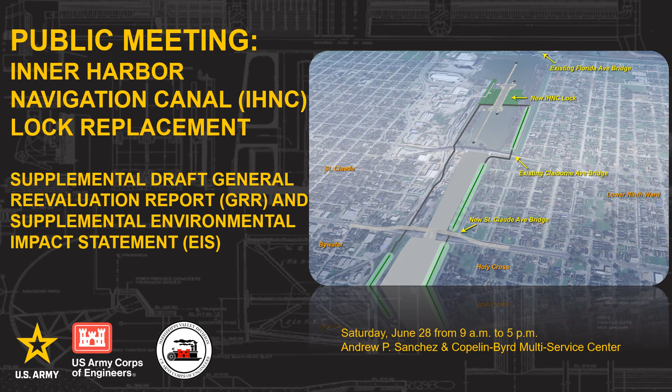The Inner Harbor Navigation Canal connects the Mississippi River to the Gulf Intracoastal Waterway, forming a key junction in the National Inland Navigation System. Just as critical is what surrounds the lock: the neighborhoods of Holy Cross, the Lower Ninth Ward, St. Claude, and Bywater. These are residential, historic, and culturally significant communities, and they're still grappling with the legacy of disinvestment and the lasting impacts of Hurricane Katrina.

The project also plays a regional role. St. Bernard Parish relies heavily on the St. Claude and Claiborne Avenue bridges to reach the rest of New Orleans. Of the four roads out of the parish, two cross this canal, making this corridor a daily means of commuting, emergency access, and economic connection. That's why this project is about more than replacing old infrastructure. It's about making sure the neighborhoods and communities affected, both directly and indirectly, are part of the planning process.

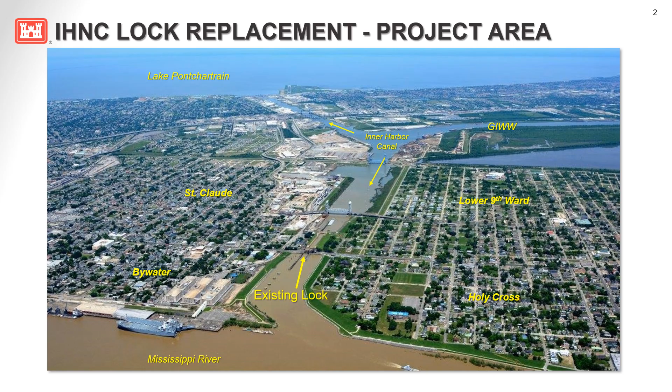Before we dive into today's agenda, let's take a moment to talk about why this lock matters on a national scale. The Gulf Intracoastal Waterway, or GIWW, stretches more than 1,100 miles from Texas to Florida. It allows barges and other commercial vessels to move cargo efficiently and safely without entering open Gulf waters. The IHNC lock is the only connection point between the Mississippi River and the GIWW on the East Bank, and it's a critical link in the inland waterway network.

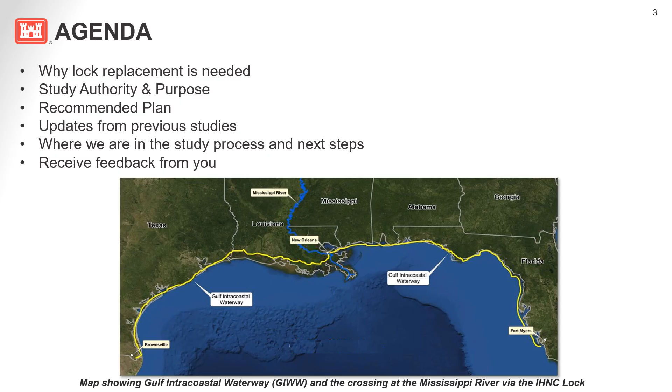It is also a bottleneck that has ripple effects across the entire U.S. supply chain. That's why this project is about more than just concrete and gates. It's about improving efficiency, resilience, and, due to the Community Impact Mitigation Plan and Transportation Mitigation Program, community outcomes. Today, we'll walk through why the lock needs to be replaced, what the recommended plan includes, and how your feedback continues to shape this effort.

The IHNC lock is 102 years old and was built for a very different era of navigation. Today, it's simply too small to accommodate most modern barge configurations. Because of that, the lock now ranks first in average transit time and second in average delay time of any lock in the nation. It's also increasingly unreliable, with more frequent unplanned outages and a growing backlog of maintenance needs.

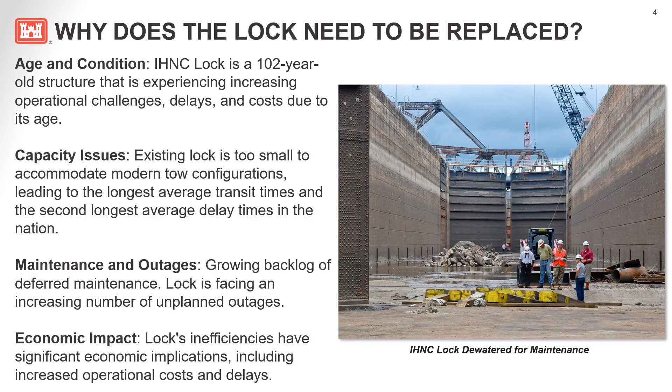These delays increase shipping costs, which ultimately affect businesses, consumers, and the overall economy. These inefficiencies have a national economic impact. Every delay raises costs for shippers, and those costs are ultimately passed down to the consumers. Replacing the lock is essential to ensuring this key national corridor continues to serve the country effectively.

While the lock itself is a major constraint, there are broader infrastructure challenges that factor into this project. The St. Claude Bridge, which is part of the current lock structure, is also over a century old and nearing the end of its useful life. And when the lock is shut down, whether for maintenance or due to mechanical failure, there are no viable alternatives.

The Tennessee-Tombigbee detour adds 17 days to a trip, and the open Gulf route is unsafe for most inland marine traffic. Replacing this lock is about more than navigation. It's about improving reliability and protecting national economic flows while making improvements to related local infrastructure.

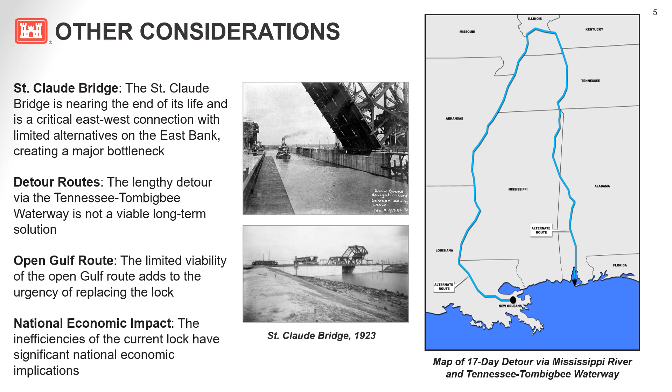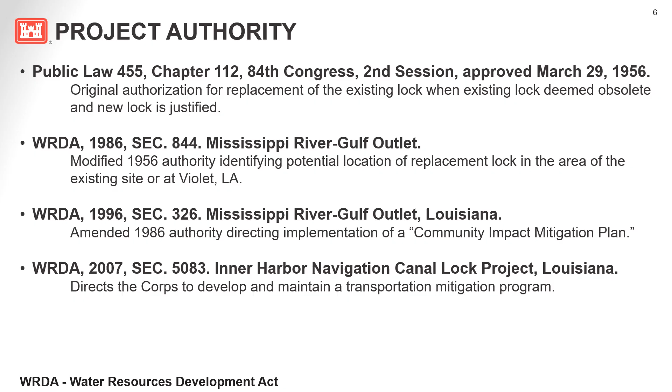The goal of this project is to improve how vessels move through the region in a way that's economically justified and environmentally responsible. At the same time, this project cannot reduce the levels of flood or storm risk reduction currently in place. That standard is non-negotiable and a central part of how the plan is evaluated.

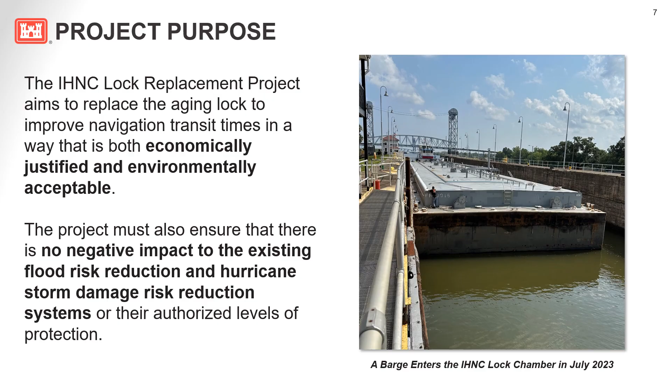On May 30th, 2025, the Corps released the Supplemental Draft General Reevaluation Report and Supplemental Environmental Impact Statement, or GRR and SEIS. This document evaluated multiple options, including taking no action, and identified a recommended plan. At its core is the construction of a new 900-foot long, 110-foot wide, and 22-foot deep lock to be built within the existing canal footprint between Claiborne Avenue and Florida Avenue.

The plan also includes a new permanent double bascule bridge at St. Claude Avenue, new levees and flood walls that tie into the regional flood risk management system, phased demolition of the existing lock, borrow materials sourced from the Bonnet Carré Spillway to reduce haul distances, and implementation of the Community Impact Mitigation Plan and a Transportation Mitigation Program to reduce and mitigate for effects on surrounding neighborhoods. We'll talk more about those mitigation plans later in this presentation.

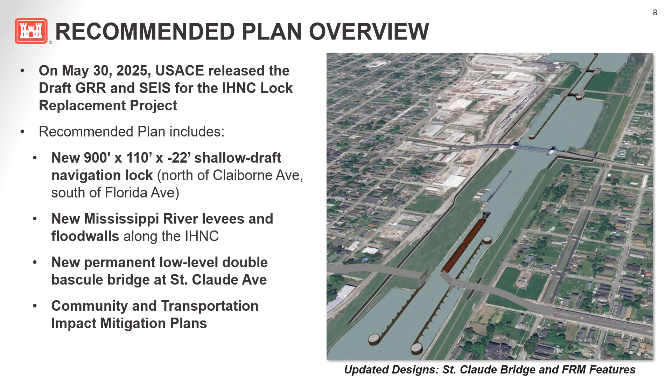Today's tows are often made up of 4 or more 295-foot long by 54-foot wide barges. But the existing lock, which is only 640 feet long, can't fit most of these tows in one pass. That means crews have to break the tow apart, lock each piece through individually, and then reconnect them on the other side. This is time-consuming, increases wear and tear on equipment, and leads to delays for every vessel in line.

The new 900-foot lock allows these same tows to pass through in fewer trips, or even without breaking apart at all. This means fewer total lockages, shorter delays, and lower costs for shippers. It also means a reduced number of times that the St. Claude and Florida Avenue bridges need to be opened for vessel passings.

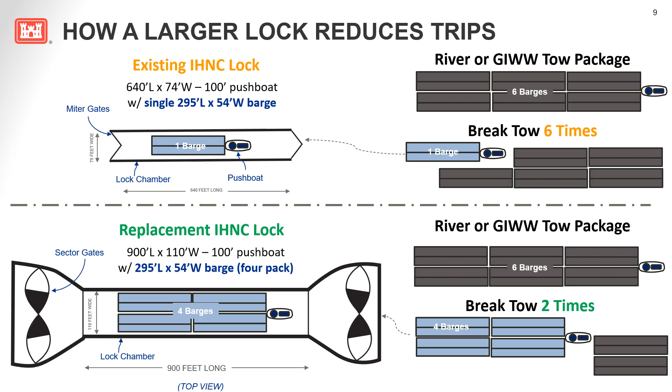However, there's a trade-off regarding bridge openings. With the new lock located farther north in the canal, Mississippi River water levels will pass under the Claiborne Avenue Bridge, which means it will need to open more often during high river stages. A key finding from our modeling shows that the duration of opening stays the same, typically 7 to 10 minutes, although openings are occasionally lengthier. So again, while the frequency of the Claiborne opening increases at certain times of the year, St. Claude and Florida will open less often.

The plan includes a new St. Claude Bridge with ADA access and a protected bike lane, and a design that avoids the need for a temporary bridge or a long-term bridge closure. The current bridge will remain in service during construction, with at least one lane open in each direction and pedestrian access maintained. The real estate plan now includes acquisition of 3 residential properties on St. Claude Avenue. These property owners have been notified per the Uniform Relocation Act and are eligible for relocation assistance.

Removal of the temporary bypass channel allows engineers to convert flood walls on the east side to levees, which are more resilient, more attractive, and more user-friendly than flood walls, improving the viewscapes along Sister Street and Jordan Avenue, as well as recreational opportunities. This time, mitigation planning has been strengthened, more responsive to community needs, and shaped directly by public feedback.

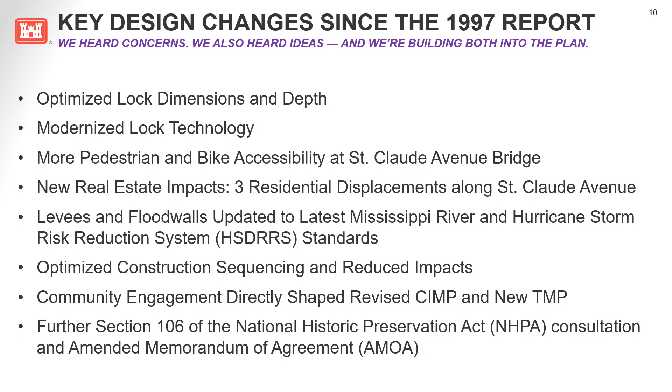And finally, under the requirements of Section 106 of the National Historic Preservation Act, we've been coordinating with consulting parties to ensure cultural and historic resources are considered. The process, called the AMOA, or Amended Memorandum of Agreement, is being developed now and will be included in the final report.

The neighborhoods surrounding the IHNC, Holy Cross, Lower Ninth Ward, Bywater, and St. Claude, have changed dramatically since this project was first studied. That's why, in 2023, the Corps led a two-phased outreach process to listen, learn, and improve transparency. Over 280 residents participated, contributing over 500 comments and more than 90 individual ideas for community mitigation.

Common themes included affordable housing, safety, health services and job training, flood risk, air quality and noise, concerns over property values, culture, and neighborhood identity. About two-thirds of the comments expressed opposition to the lock replacement or to the project more broadly. But many participants, even those critical of the project, still offered creative, thoughtful suggestions for community benefits and neighborhood investment.

That feedback directly informed changes to the Community Impact Mitigation Plan, or CIMP, and development of the Transportation Mitigation Program, or TMP. And they also help guide our ongoing Section 106 consultation process with consulting parties, where we're working to assess and resolve adverse effects to historic properties caused by the project.

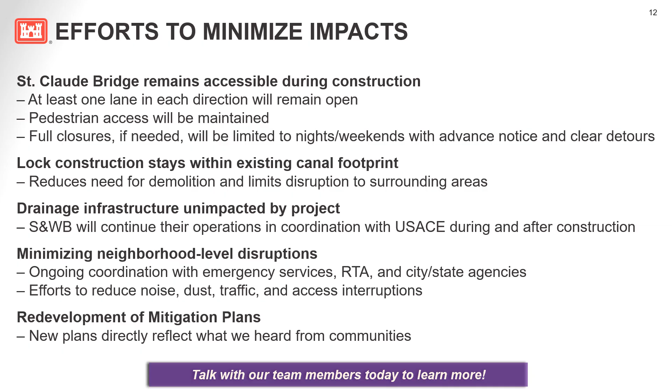The Community Impact Mitigation Plan, or CIMP, also known to some as the Community Opportunities Plan of Action, is one of the most important features of the IHNC lock replacement project that the Corps is using to reduce the burden of construction on surrounding neighborhoods. Originally developed with the IHNC replacement project's recommended plan in 1997, the CIMP is a flexible framework designed to offset or minimize the short and long-term impacts of this project. It has been updated based on the present needs and concerns of the community.

It includes potential investments in things like noise barriers, air quality improvements, street repairs, sidewalks and lighting, public spaces, and neighborhood amenities, all based on the feedback we received from residents during the 2023 engagement process. The measures included in the draft CIMP were directly shaped by what we heard from you. That includes concerns about health, safety, flooding, mobility, and quality of life.

But one of the most important things to understand is that the CIMP is intended to be a flexible plan that meets the changing needs of the community. The Corps will continue working with local leaders, potential non-federal sponsors, and community members to refine and implement mitigation in a way that delivers real, tangible benefits. If there's a mitigation idea that's important to you, something you don't see in the draft, we encourage you to share it today. This plan is meant to adapt to what the community needs, not just what's on paper right now.

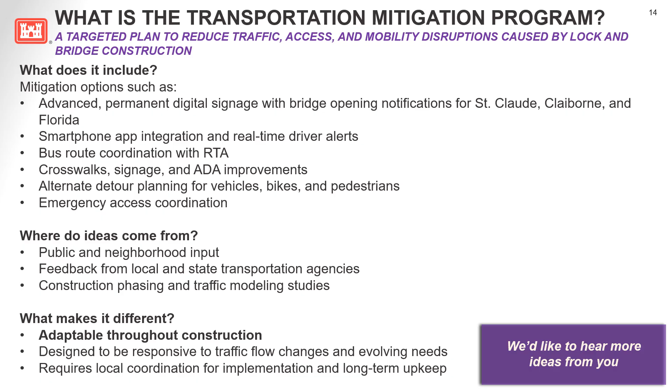The total estimated first cost of the IHNC lock replacement project is currently projected to be $4.7 billion. This includes construction of the lock, new bridge, levees, flood walls, and more importantly, the full implementation of the CIMP and TMP. These mitigation plans are not optional or separate. They are fully integrated into the project budget and required for the project to move forward. Funding for construction will come 75% from the U.S. Treasury and 25% from the Inland Waterways Trust Fund, a user-supported federal fund for commercial barge traffic. Once the project is complete, operation and maintenance will be 100% federally funded.

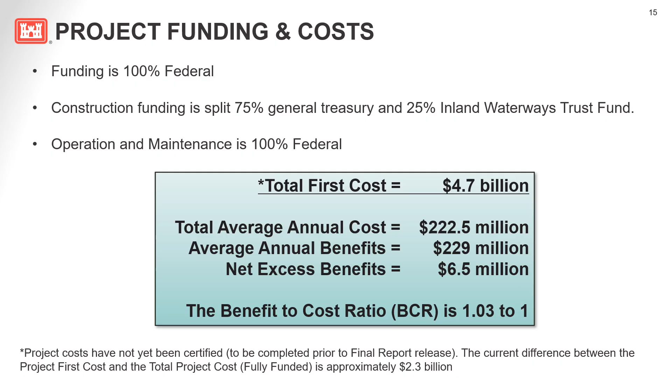This project has a benefit cost ratio, or BCR, of 1.03, meaning it provides more economic benefit than it costs, a key threshold for continued federal support. The current cost estimate reflects the latest available data, but has not yet undergone final certification. That will happen before the release of the final report. The fully funded cost, which includes inflation and full life cycle budgeting, is approximately $2.3 billion higher than the first cost, but still in line with other large-scale federal civil works projects.

While the lock and navigation features will be fully federally funded and maintained, local sponsors will be needed to operate and maintain completed CIMP and TMP measures, such as public space improvements or traffic management features, once construction is complete. For modified flood risk reduction structures, existing agencies like the Louisiana Coastal Protection and Restoration Authority and the Orleans Levee District will continue their current maintenance responsibilities.

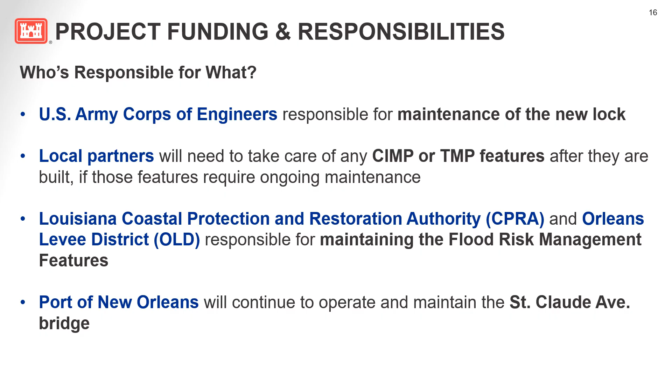If the director's report is approved, the ROD is signed, and Congress approves the increased cost, the project would move into the budgeting cycle, and pending receipt of funding, transition into what's called the Pre-Construction Engineering and Design Phase, or PED. That's when detailed engineering plans and acquisition strategies for construction are developed. It's also when the Community Impact Mitigation Plan and Transportation Mitigation Program will be refined and specific measures are prioritized based on continued community input, technical feasibility, and funding made available by Congress. These will continue to evolve during PED.

But before construction can begin, Congress must appropriate funding. While the project is authorized and economically justified, it must compete for limited federal construction dollars. If the recommended plan is approved and funding is secured, construction could begin as early as 2034, but that timeline depends entirely on the appropriation process.